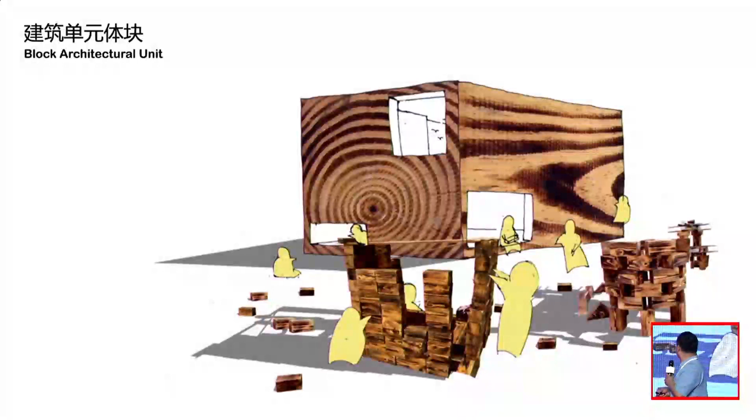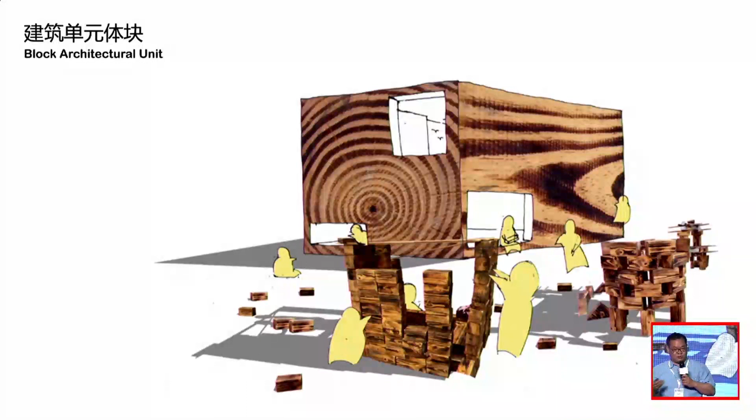As an architect in Zhangwu, we had a piece of land. A kindergarten will be built, and an early childhood center will be built. So as an architect, we want to disrupt all the traditional thinking. We want to combine the architecture with the blocks, and we also think: can we actually turn the whole process of design and construction into a play? We don't want to follow the traditional approach of design. Next, my colleague is going to talk about our concepts of architecture and also the designs we have already completed.

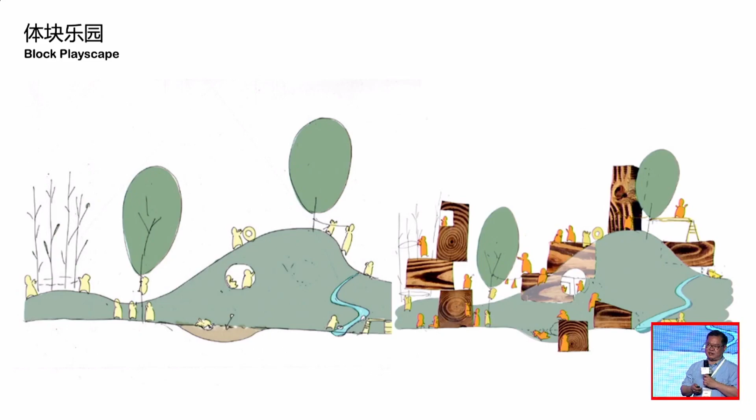When we think about design in Anji, we felt that the architecture doesn't need to be very perfect. The formality is not important. As the previous speakers mentioned, we want to leave space for imagination of the children, and enough space for observation of children. We don't want to over-design our space. There should be some design suitable for play. Maybe God is also blessing Anji Play.

In 2016, in the Zhangwu area, we were trying to find land to build an early childhood education center. In the homeland of Wu Changshuo, just opposite his hometown, there was land along the river and mountains. In the front there is a river, and at the back there's a mountain. This is a pure land, with no buildings needing removal. This land was waiting quietly for Anji Kindergarten.

Next, my colleague is going to share with you the design concept and the design process we had.

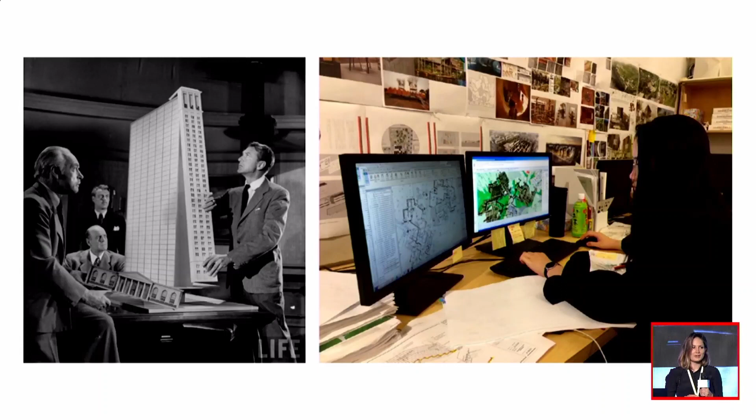We started as all other projects, the normal way. We began to rationalize the program, draft floor plans, and make 3D models in our precise software. Of course, because this was a kindergarten building, we wanted to make it playful.

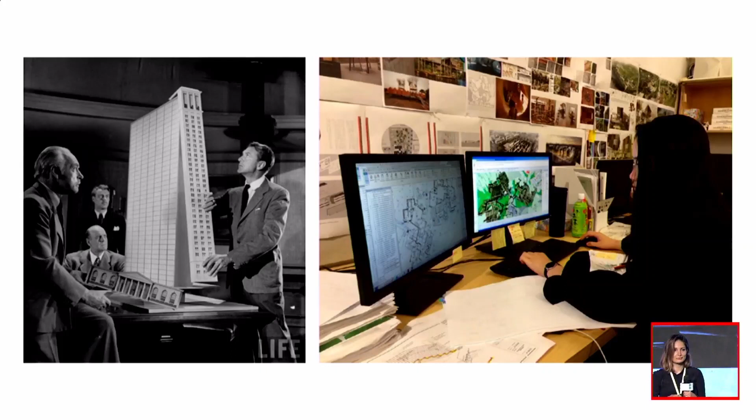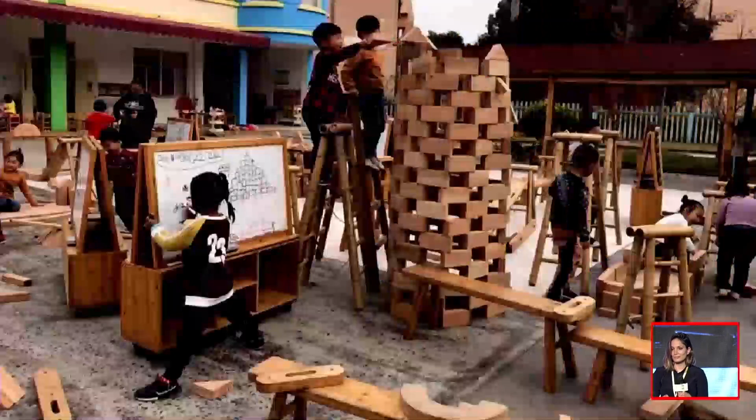We knew we were missing that soul, but we didn't know the approach to get that result. We felt the Anji Play kindergarten building seemed to lack its soul, but we found it hard to pinpoint exactly what that soul should be. One day we asked ourselves, why not be like Anji Play kids?

They create so many inspirational architectures and structures in everyday play, and they are architects with no degree and natural builders with no barrier for any rules or norms.

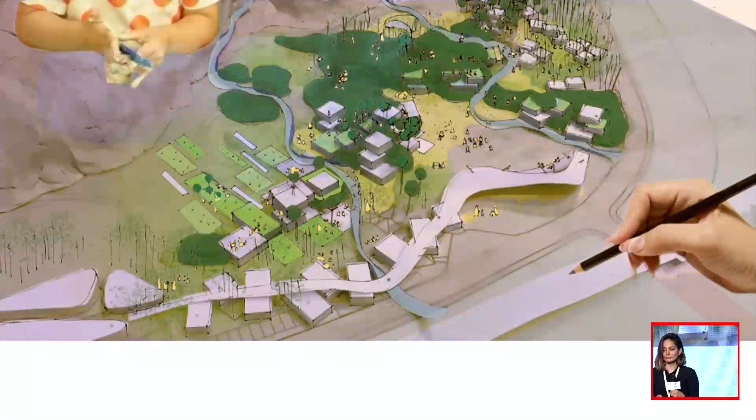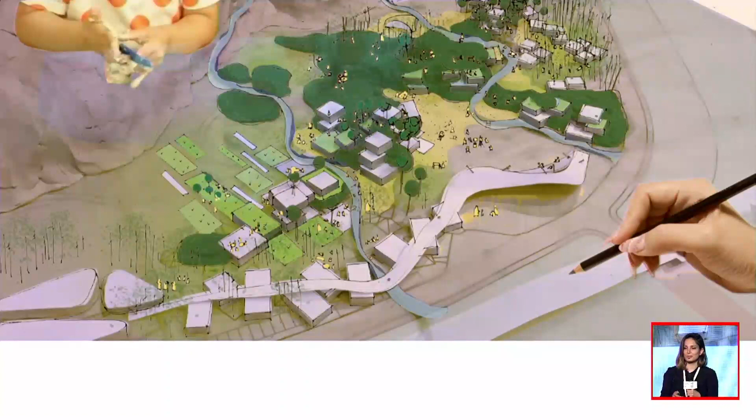So we decided to experience a hands-on experimental process, and we bought clay, and we dared to play. We set aside computer drafting and bought clay, paper, and other materials to make different models and structures to consider how the space would form. We started to build, mount, and place trees and bamboo, and then finally placed blocks as architecture units in the landscape.

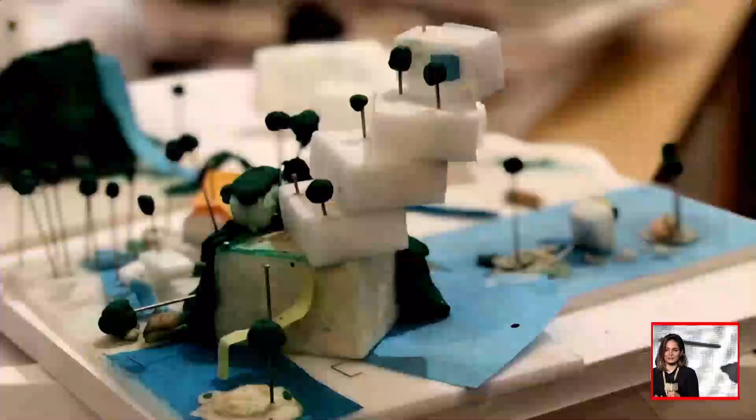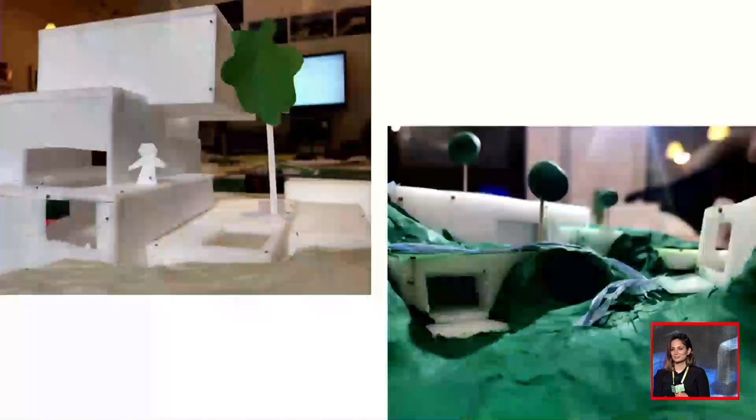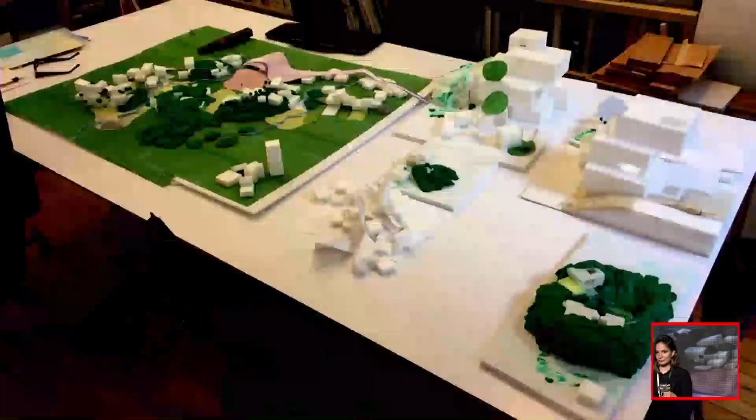The more we built models and talked with the Anji Play team, the more we found there's no barrier and endless possibilities for what we were creating, because it's a result of our imagination. Gradually, through this kind of communication with Jessie, we discovered the playfulness and freedom in the design process, an architectural design without any limitations.

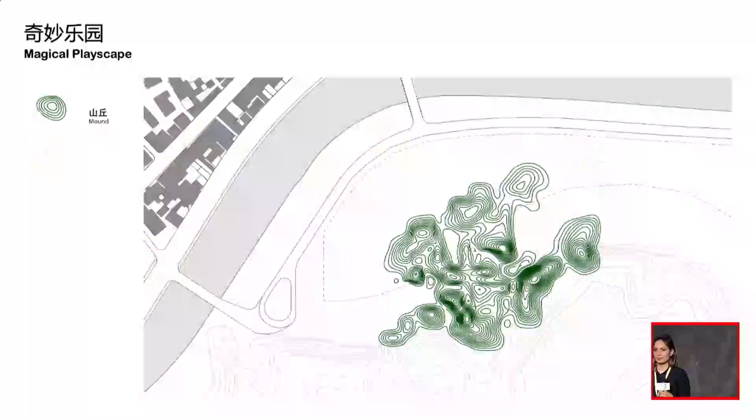Hello. I'm going to talk a little about the specifics of the site and the design thoughts behind it. As my colleagues said, when we first started, we went down several different roads, and we realized the normal path we usually design with was not going to cut it. We were a little paralyzed — there's no purpose-built Anji Play building, so we had to rethink how to think about architecture.

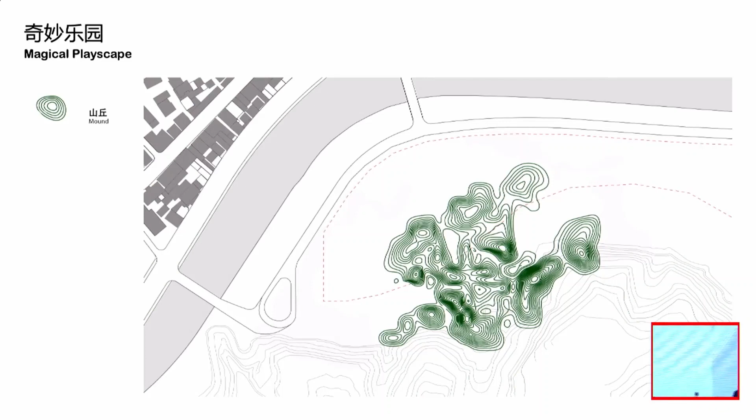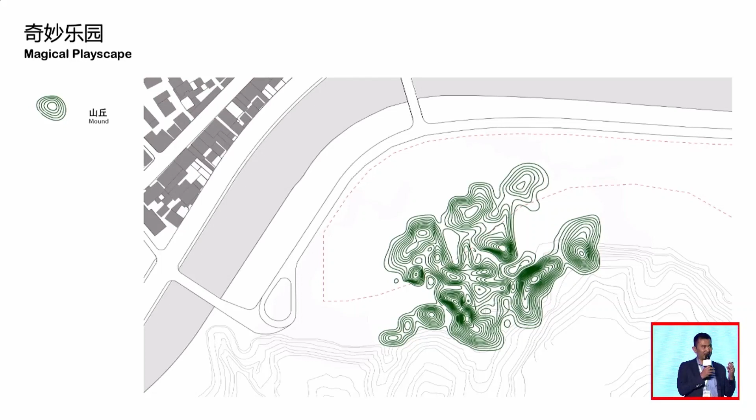We were thinking about the most elemental form of architecture, architecture without architects or educated architects. We wanted to break down the elements of Anji play: the idea of mound play, verticality and experiencing gravity, or sand play and how it could be used with water, with changes of states and materials experienced.

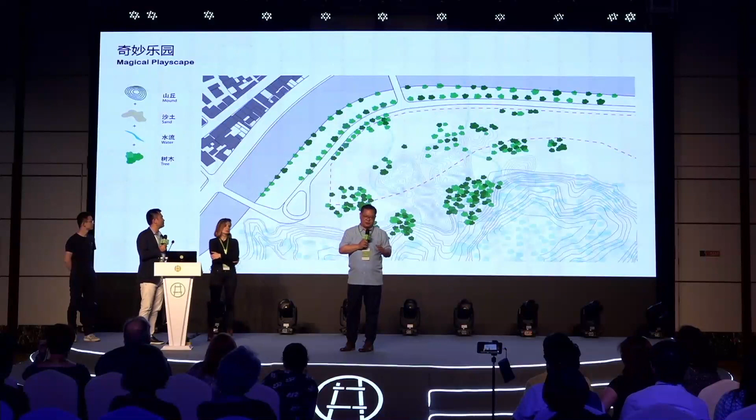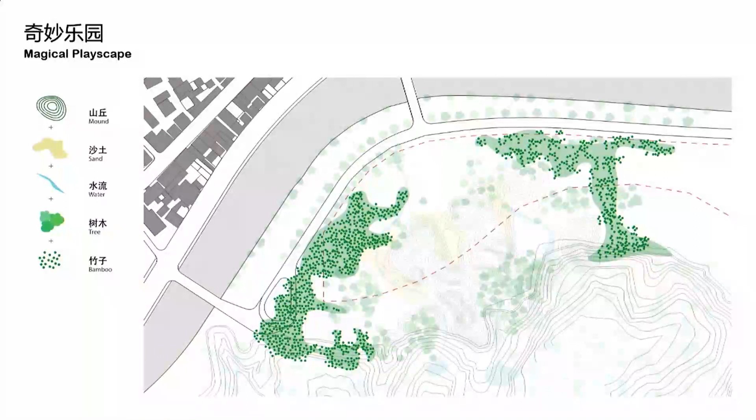So these elements started to add up for us, even the farming or farming landscape and the planting around the actual buildings.

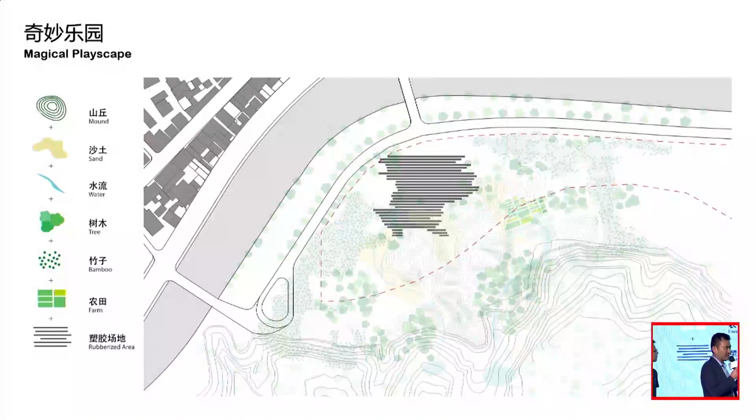And of course the rubberized areas that we saw in all the kindergartens. These were all elements we saw in many of the kindergartens we visited while doing the design. So we thought, okay, what is the missing element?

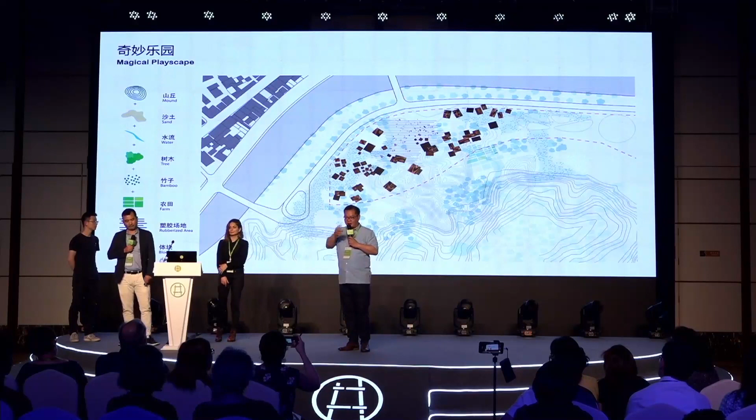In this case, the Chinese building code is written for all kindergartens to be more or less the same, three stories with open balconies. In this case, we want to make sure we're doing something very different. We identify each classroom as a homeroom, and the whole campus will be composed of little homes, as if kids are going home. Also, the idea that we didn't have a specific place for sand and a specific place for trees or water.

But we wanted to blend these things in, and we thought of the idea of blending and blurring as one of the elements that we could bring into our architecture.

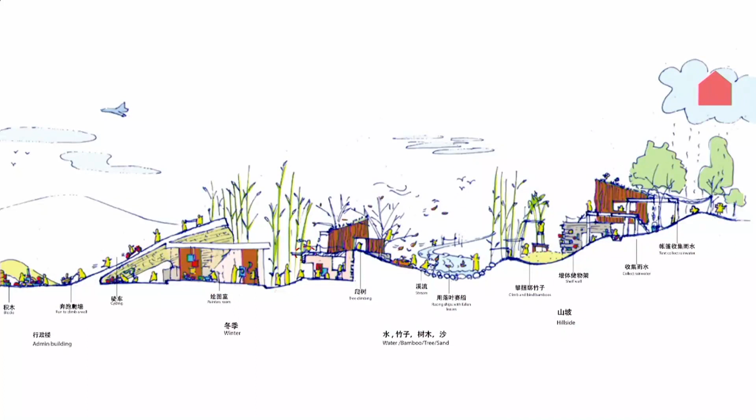So we got pretty good, a little more confident, but every time we stepped forward, there were times we'd look back and think, it's a little too designed, too precious, over-designed. This diagram always came back to us, and we were rethinking what we were doing. It was always an iterative process, but a lot of it was actually stepping back.

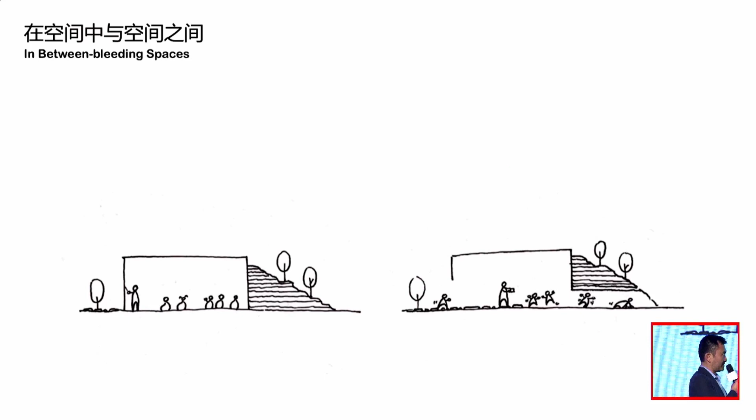另外一个重要的理念呢，我们希望这里的空间呢，它并不是一个室内室外完全分开的空间，特别在第一层呢，应该是一个室内室外比较交融的这样一个空间。所以呢，儿童呢，既可以在户外玩，也可以在室内玩耍，而且呢，第一层就成为一个半室内半室外的这样一个空间。Always thinking about visual sight lines, but also thinking about varying scales for the occupants.

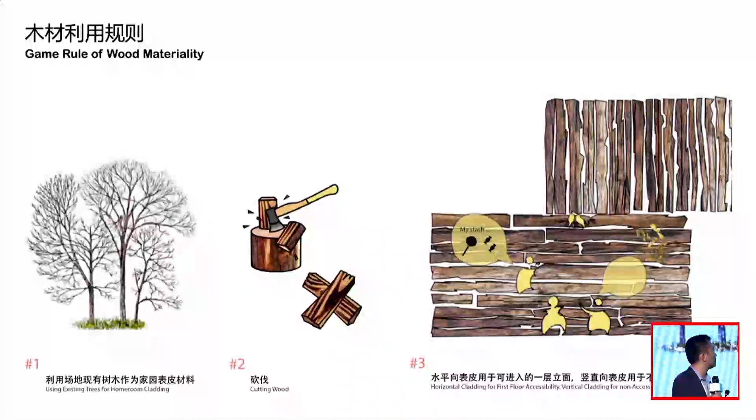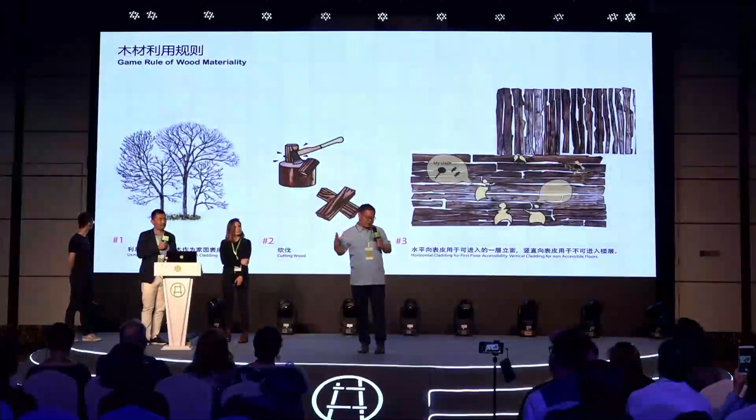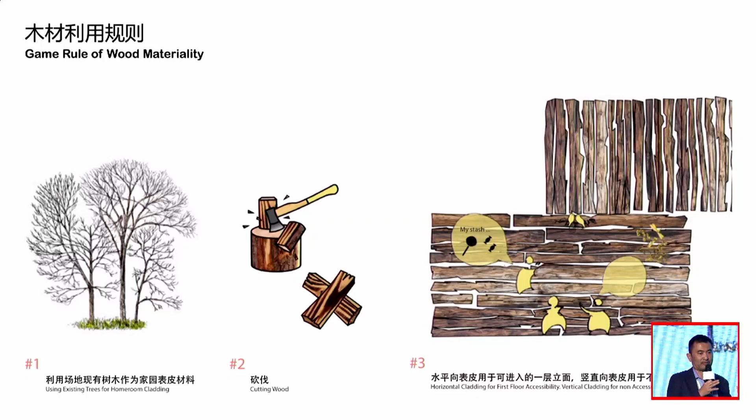另外呢，尺度也是很重要的。我们希望它能够首先跟周边的自然环境有充分的交流，同时呢，有的空间的尺度呢是为儿童设计的它的尺度，而不是一个成人的尺度。And we also thought about the material, the place. We always think about this in our architecture, but we're inspired very much by the site, of course, the beautiful environment, but also thinking about how perhaps trees that were actually on the site can actually become part of the building. 所以呢，我们在材料方面呢，也希望能够用一些基地上的一些自然的材料，同时呢，也用比较简单的一些自然材料来进行这个建筑的设计。Or using concrete, cast concrete that we're adept at, but it's an honest material, but using actual natural materials to cast it, and then actually using the architecture to become part of the playscape.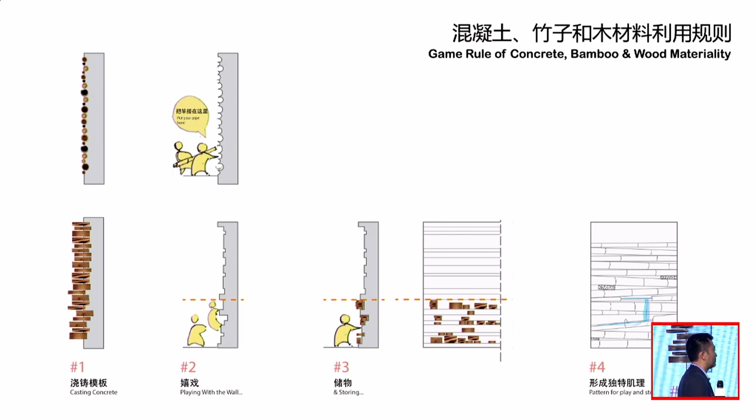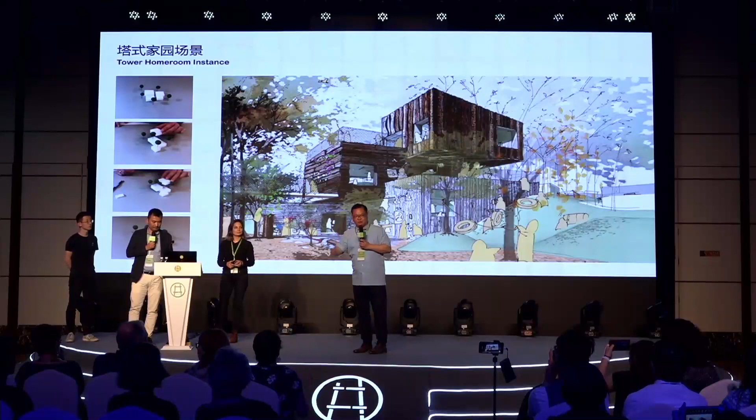刚刚讲的材料，我们希望在这里呢，它是一个比较简单，不是做作的这样一个建筑，所以呢，回到人类最古老的材料混凝土，我们在这里呢也会用一些混凝土，而且我们会用不同的模板，包括竹子啊、木材啊，做它的表面的一个处理。

But of course, we had a program that we worked very hard with Ms. Chung to get to. There are program spaces for 30 kids, a transformable classroom, a sleeping area, a mezzanine area, and these were the building blocks that we talked about that actually we started to play with and the situations within certain areas in our site. So this is a tree tower homeroom that we thought of when we were looking at the different areas of the actual design.

所以一共有16个班级，16个家园，每个家园呢会有它的一些功能要求，包括底层的一个开放空间，2层、3层的一个休息睡觉空间，而且呢，它也会跟周边的一些沙丘啊、山地啊形成关系。And again, the same blocks, but in a mound area.

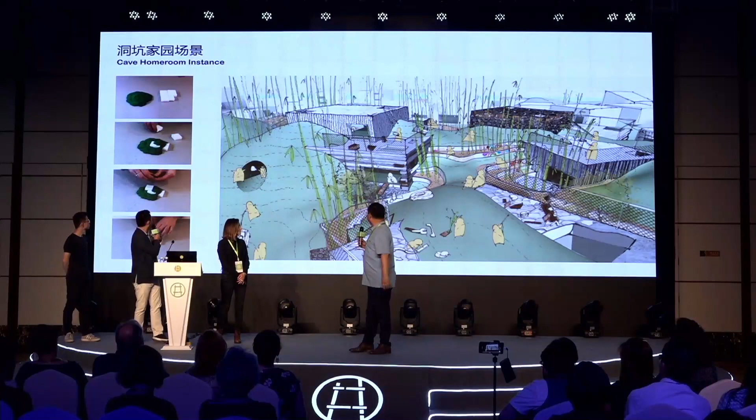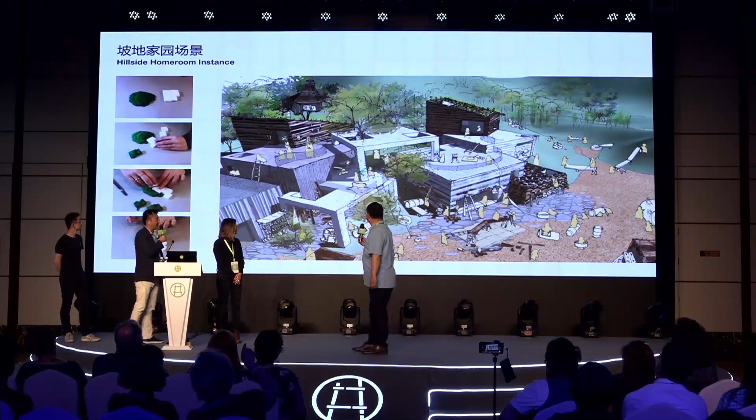所以呢，有的地方的入口并不是一个门走进去，有可能是小的山洞钻进去。在这里呢，我们希望建筑是各种可能皆有。And then again on a hill. 这是在坡地上的一组家园。Or with the farmland integrated with it. 这是跟农地结合的一个家园。

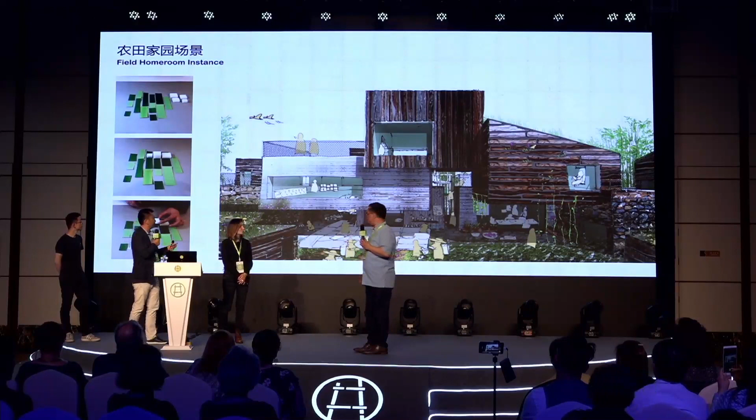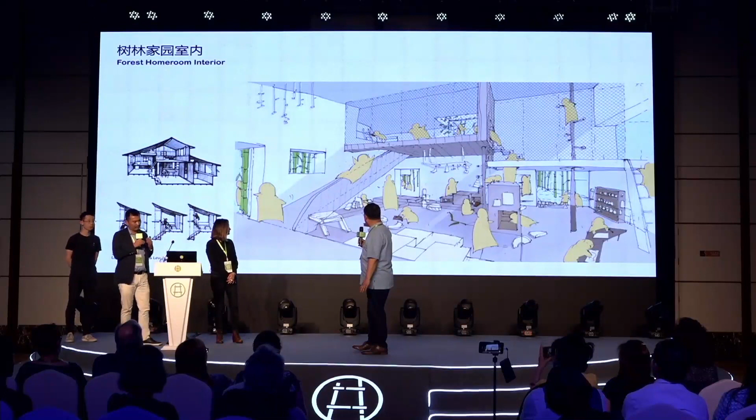这是跟竹林结合的一个家园的模式。And then we also started to look at the interior a little bit further and the vernacular of the local architecture, especially the hill architecture, sense of scale and level changes, but trying to create actual interiors for a kid scale or kid-friendly interior.

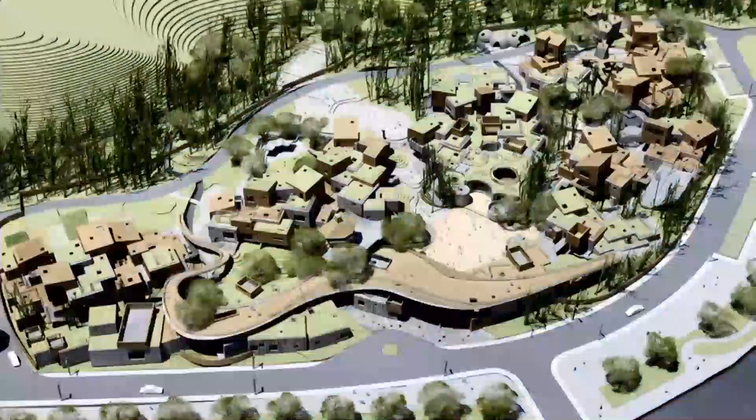所以在室内呢，我们是参考了浙江的一些民居的传统做法，同时呢，介入了刚刚说的一个尺度。我们希望在室内呢，有的空间呢，只有儿童才能进入的这样一个儿童的尺度的空间。所以呢，室内跟室外是一个贯通的这样一个过程。So this is where we are at this moment, which I say because it's always evolving.

目前呢，这个幼儿园已经开始施工了。这个是一个模型的照片，就是在这个阶段，我们觉得这个设计的这个阶段当下的这样一个状态。This is the phase 1 part, which is the kindergarten part. There's a phase 2 that's more the teaching research area. 这个项目一共分成2期，一期呢是幼儿园部分，2期呢是会议中心啊、研究部分。And as I showed you before about the tree area, the bamboo area, the mound area, these were prototypes that we started with thinking that we can keep most of it.

And we had 5 clusters, A, B, C, D, F, and G, sorry. And what turned out to be 5 prototypes became 39 individual buildings. 我们一共有5组不同的一种布局，经过组合以后呢，形成了16个家园的建筑。So exciting for architects, very scary for business owner, architect. 虽然这个建筑将会很有意思的建筑，但于作为公司的老板来说，也是一个很头痛的一件事情。这设计变得非常的复杂。

So you could see the clusters from A would be the entrance. This is more the administrative. There's an assembly hall. There's a large rubberized surface area. There's sand and water running through. But as you saw in our diagrams, we really try to blend these elements together, bleed those experiences, and afford different types of experiences that weren't dictated.

And this was the state of design when we ended our design kind of phase at one point. And I say this where I said this is the state of it because we always think we went through this process. It was very much a relearning process and a play process. But the principles are there. Perhaps if we go through this again, it may evolve even more.

But we also know that 39 buildings, there's no way we're going to document it the way that we usually do with a museum or some other building. And we didn't want to. It wasn't about creating this precious glass and metal building. We wanted this to actually evolve. We created certain rules or guidelines for construction, but we very much are depending also on the people who are doing the construction and Xiaoyu to execute some of that. And we look forward to the evolution of this as much.